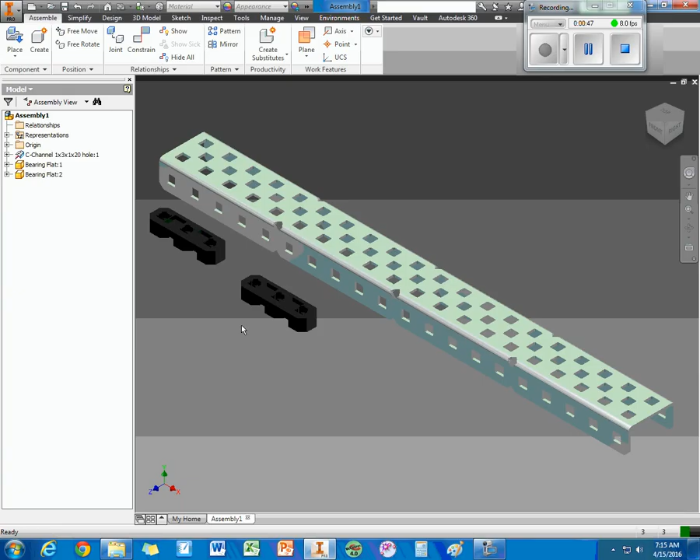Now what I'm going to do is mate the surface of that bearing flat to the surface of that. Apply that.

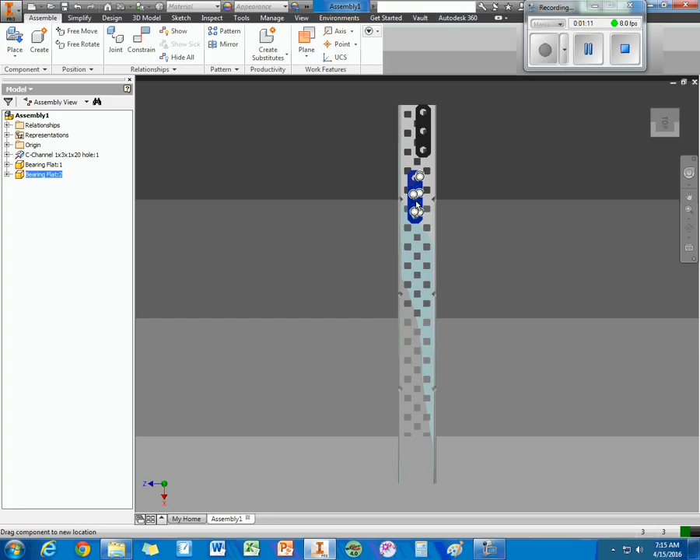Now when I look at the top, I already know that I want to use a 12 tooth gear and a 36 tooth gear. That means my bearings have to be separated by one empty spot right here. You'll want to take some time to actually grab some of these and see how much spacing you need, depending upon which gear you use.

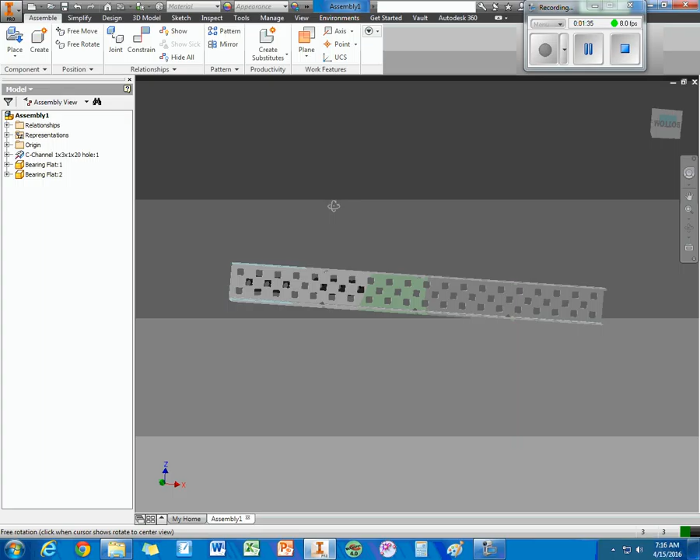All right, now I'm going to do a quick little tangent constraint. Offset it by 0.009. And over here, so that bearing flat's secure.

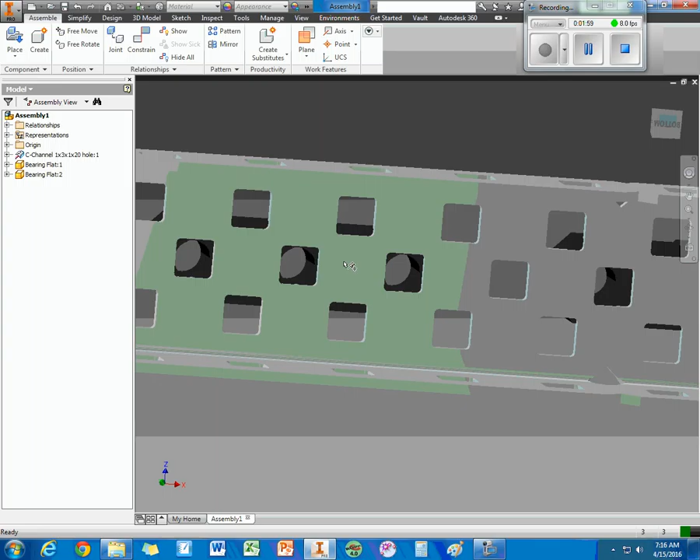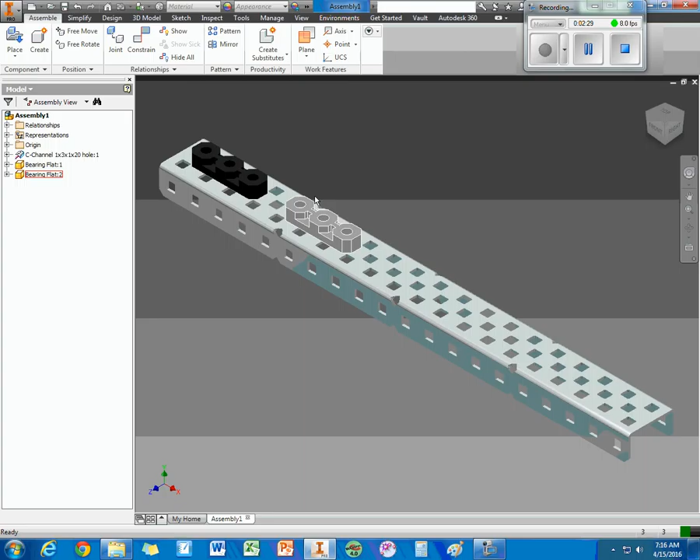Now for this one, you need to have, for a bearing flat, one mate and 3 tangents. So there we go, those are nice and locked in there. Alright, we can then place screws in those bearing flats, but I've already got a video showing you how to do that.

Now for some drive shafts, I'm going to use 3-inch drive shafts. They're just called shafts in the folder. I'm just going to place 2 of those.

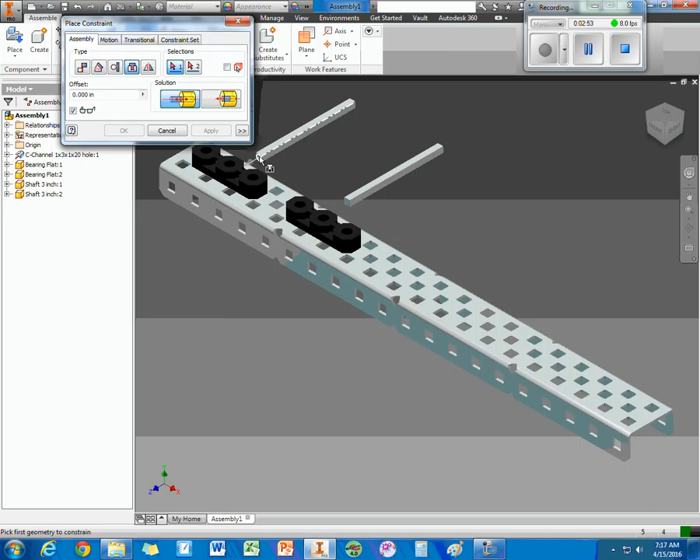And for these, I'm going to use an insert constraint. So that's the fourth one over, and I'm going to look to see if I can get that arrow. So if I zoom in here, we want to get this little circle here, and get that arrow. And here I want this arrow pointing up.

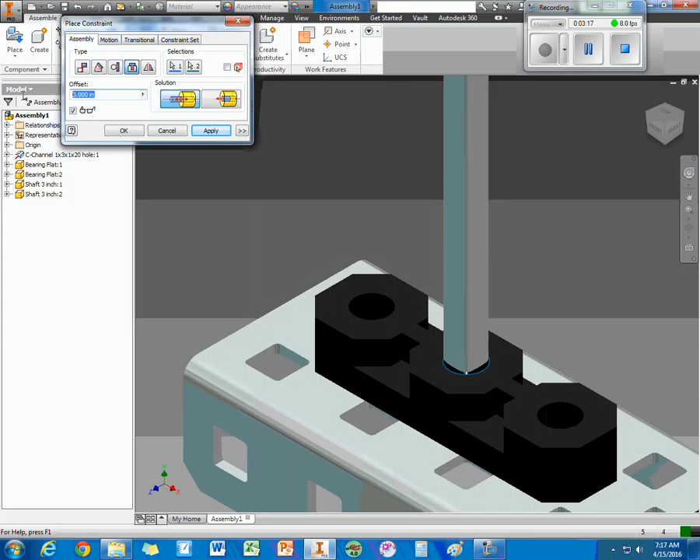Now we see that it's just kind of stuck there. I can change the solution. I'm going to leave it on this first solution, but I'm going to offset it negative 0.375.

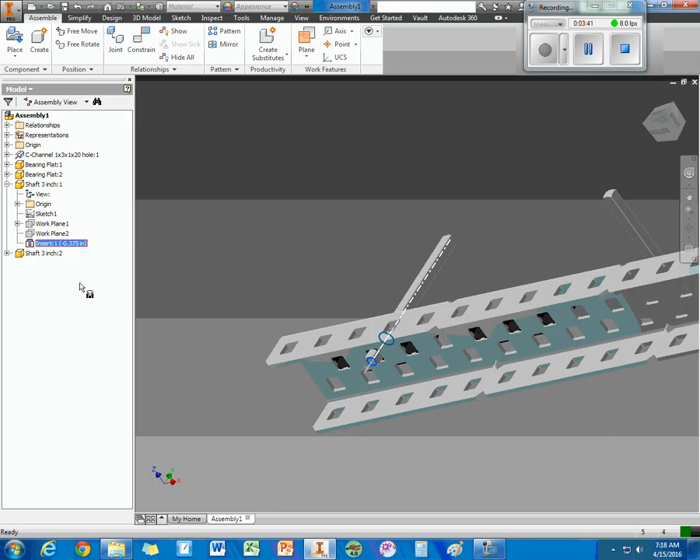And what that does is puts a little bit, actually, it might not be enough here. I'm going to go to this drive shaft and edit this offset. I'm going to change it to negative 0.45. It doesn't look like it's enough. Make it negative 0.5. That looks better. That gives me a little bit of space.

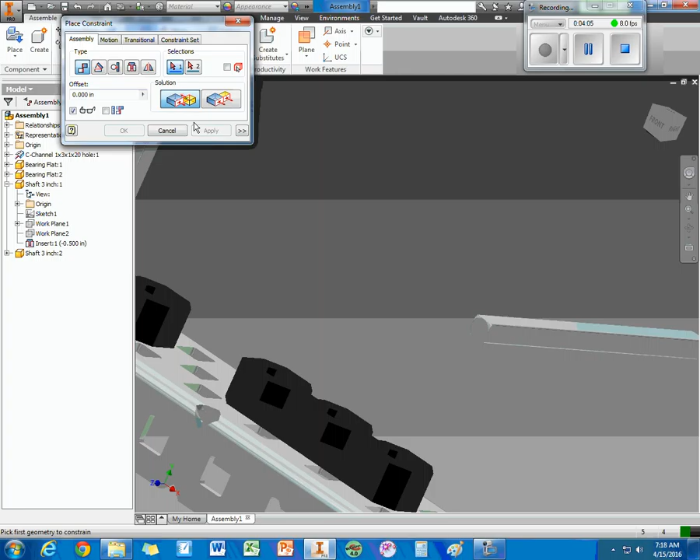I can put a shaft collar on it. Alright, now let's get this other drive shaft in place. So we'll use the insert constraint. Get this ring, get that ring. We'll offset it by negative 0.5.

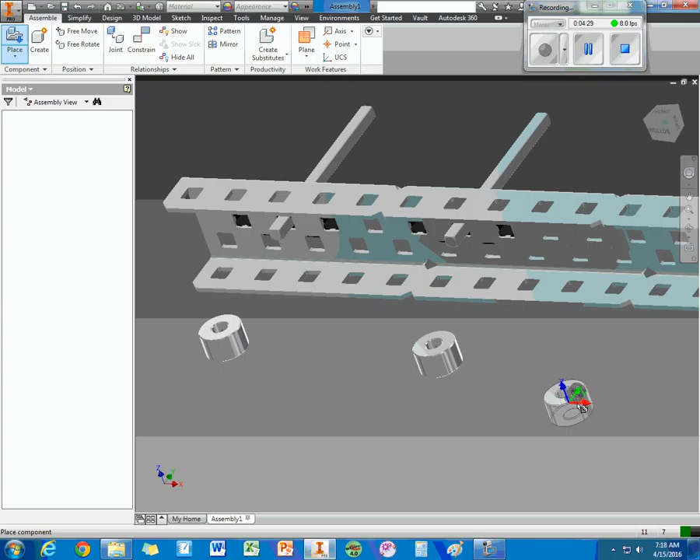Alright, now let's put some shaft collars on these. Okay, here's a shaft collar. I'm going to need 2 of them. And I'm just going to mate this surface to that surface. Apply that. That surface. And then we'll mate the center line.

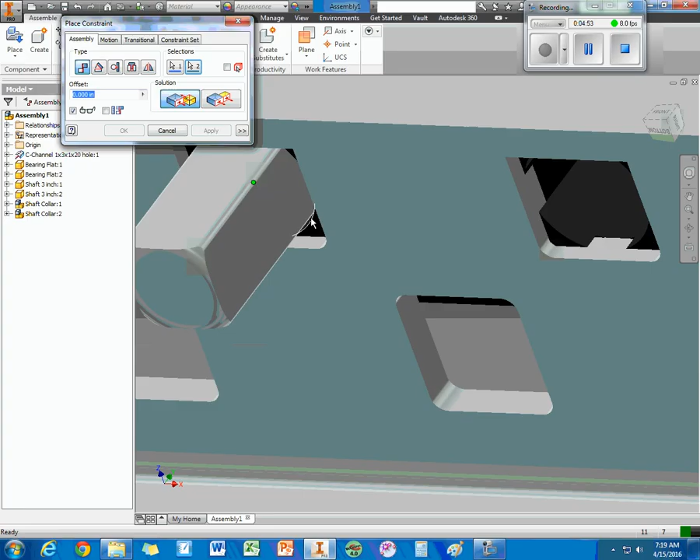Now we have to get the center line, not of the drive shaft, but the center line of the bearing flat. I'll zoom in here and get this edge. And looking here, I see that the drive shaft just doesn't come out quite enough.

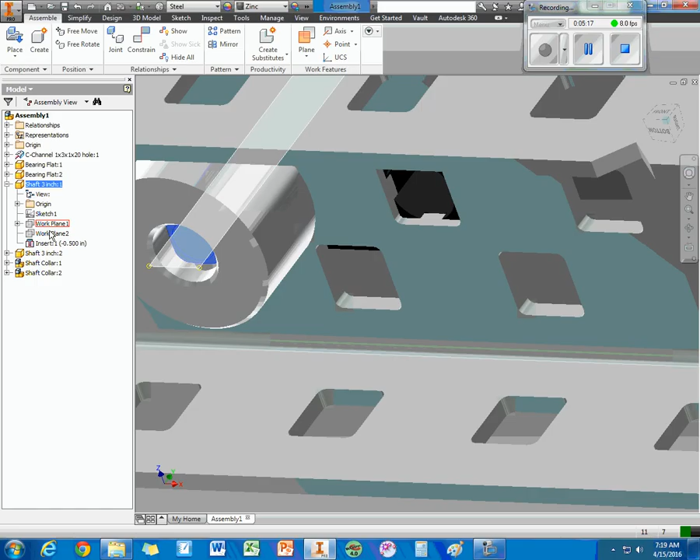So I'm going to go back to those drive shafts again, and I want to edit that negative 0.5. Just isn't enough. 0.56, that looks better. So negative 0.57 is what we needed. So that means for the second one, we need to do the same thing.

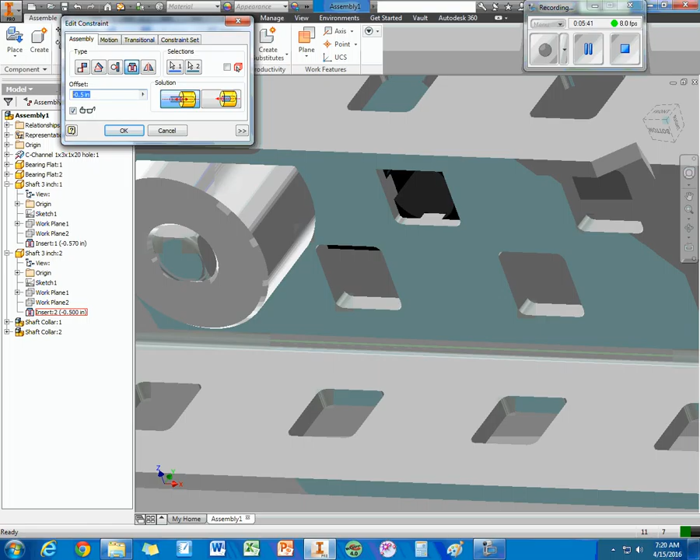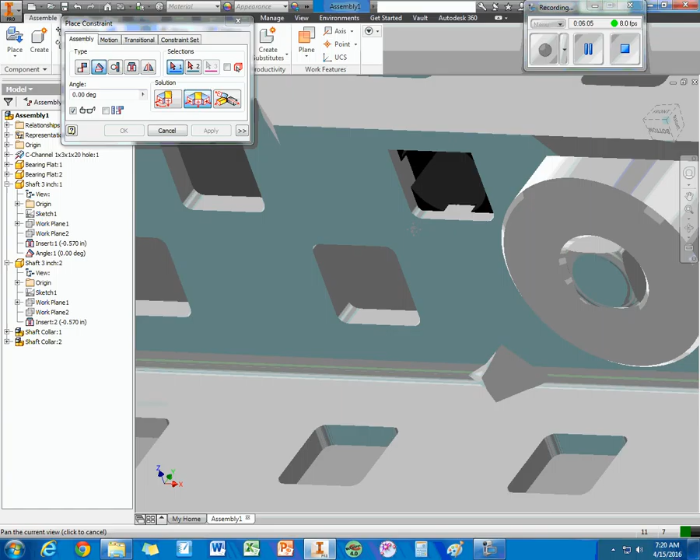All right, now this shaft collar, it's not moving with the drive shaft, so now I need to do an angle constraint. We'll use the middle solution, and we'll get this surface with that surface. Let's rotate this around. It will. There it is.

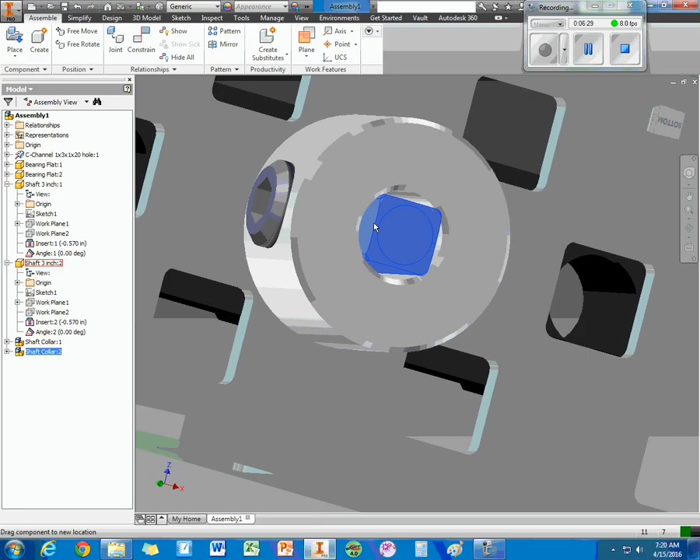So angle constraint, center solution. There, and we'll choose that surface. And now, if we move this drive shaft, this shaft collar will move with it. Like that.

Okay, now let's put some gears on this. I'm going to pull up an 84 tooth gear and a 12 tooth gear.

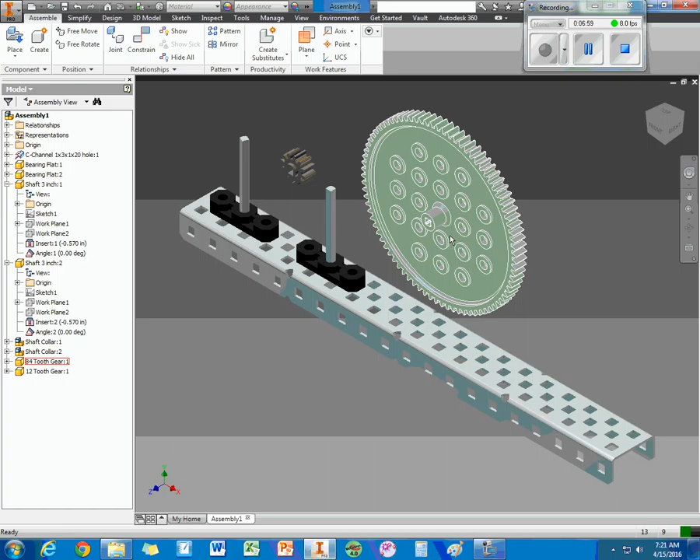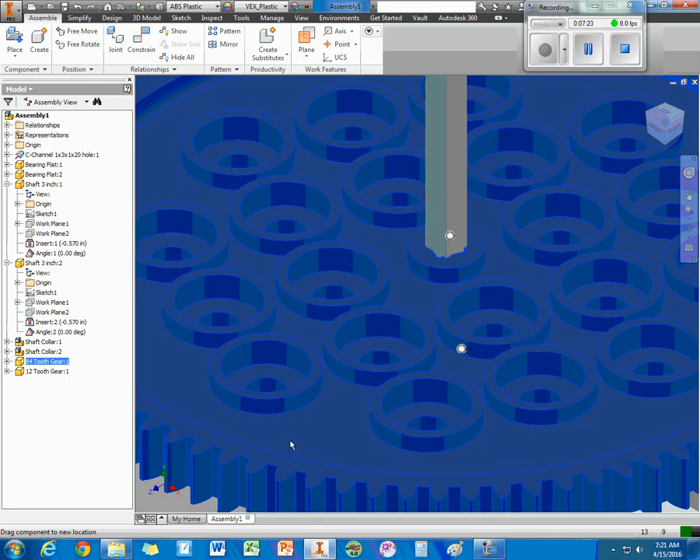Okay, so for this one I'm going to use an insert constraint. I'm going to get this, make sure you get this outside edge here. Again, I want to get this circle on the bearing flat. But notice that if I go to turn this, it's not turning the drive shaft.

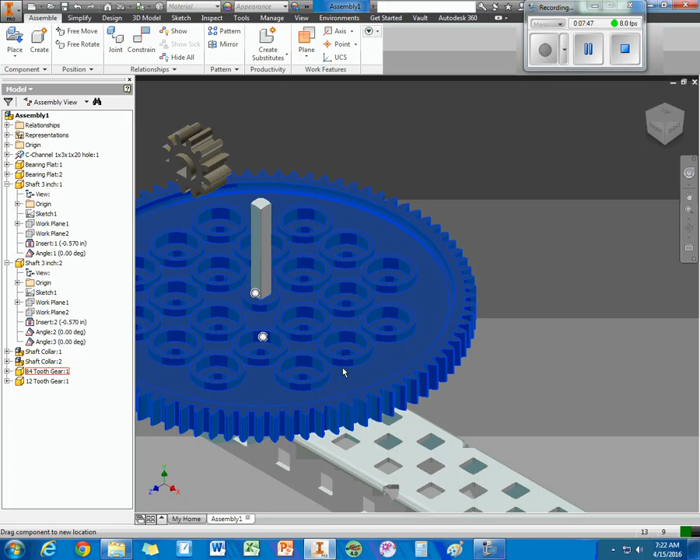So I've got to use an angle constraint to tie those together. Before I do that, I'm going to move this slightly out of the way so I can see the inside of this gear. So now when I do my angle constraint, it doesn't want to do it. I'm running out of memory on my computer, but those two are locked together.

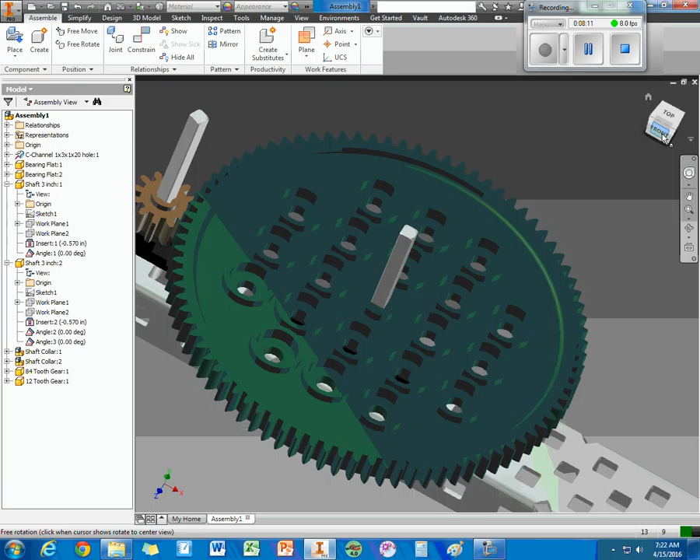Now I need to do another insert constraint for the 12 tooth gear. But we see that there's a problem, they don't line up. That's because this 84 tooth gear has this collar on it where this 12 tooth gear doesn't.

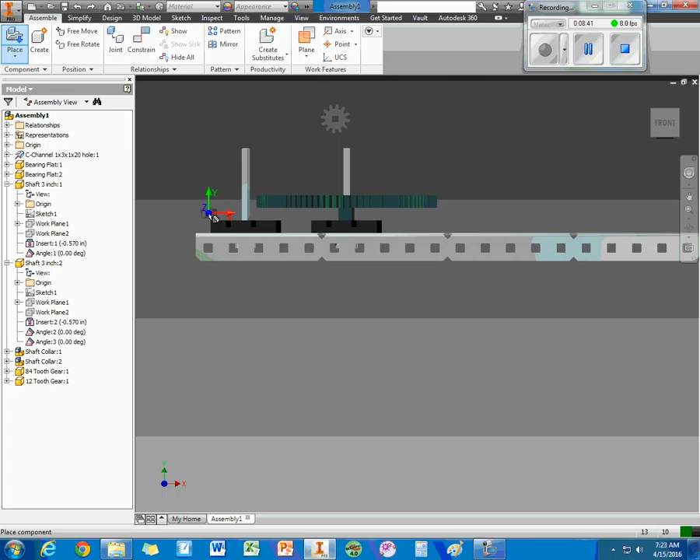So I'm going to undo that. I'm going to put a spacer there. Now the spacer you need is found in the structure folder, and it is a 4.6 millimeter spacer. I'll rotate this on the x-axis.

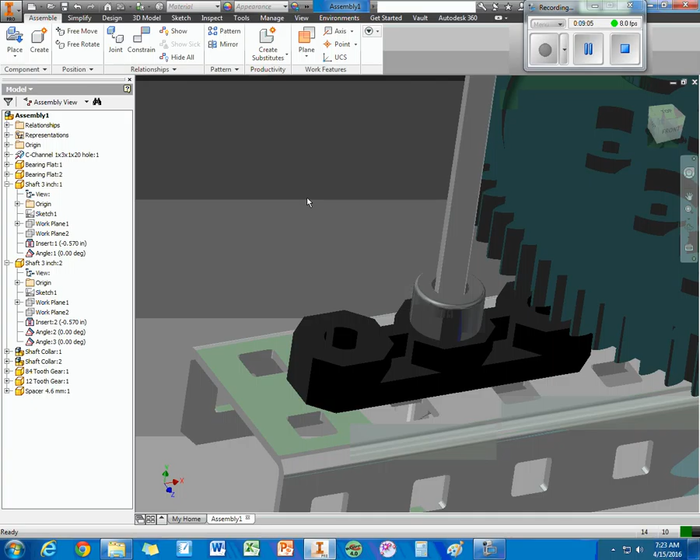And then I need to do an insert constraint. I'm going to get this back edge with that there. And now I can do an insert constraint with that 12 tooth gear, and that lines them up nicely.

Okay, I'm not going to worry so much about getting the teeth meshed together, not yet. However, I do need to do another angle constraint to get that 12 tooth gear. There we go, I'm just going to rotate this gear around a little bit, get it close.

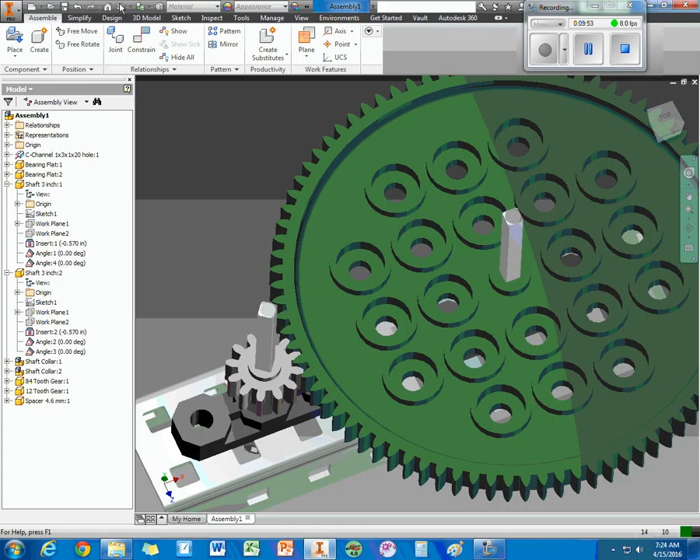Right now I can do a motion constraint between these two gears. Now for this one, you always want to choose the reverse because when one gear is turning clockwise, the other one turns counterclockwise. And what I'm going to do is I'm going to do 12 divided by 84, which means that I need to click on my 12-tooth gear first and my 84-tooth gear second.

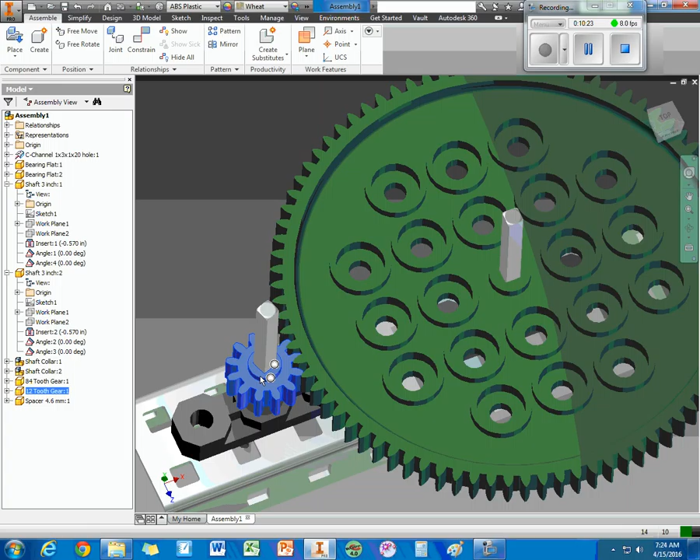And now, there we go. We can see that they're turning properly there. All right, after that, it's a matter of applying wheels and putting screws and everything else.